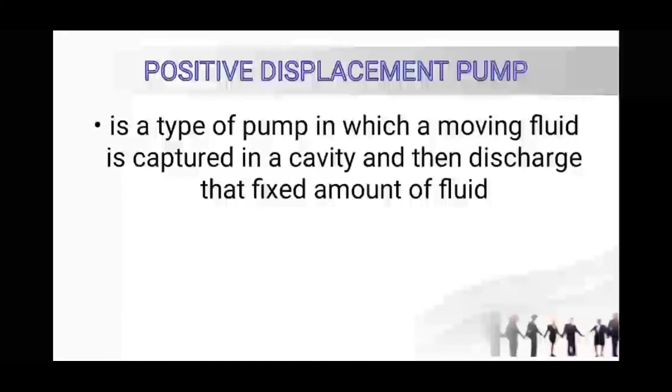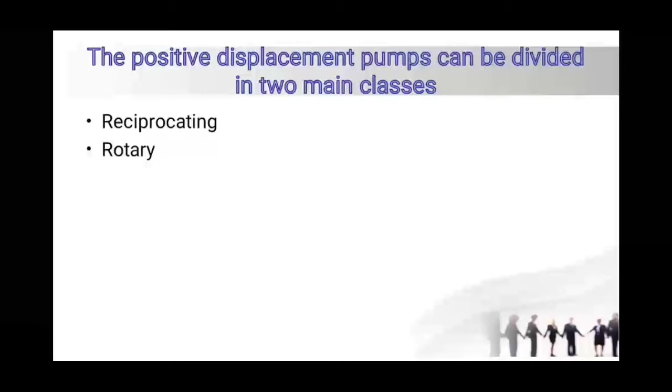Positive displacement pumps can be divided in two main classes: reciprocating and rotary. A reciprocating pump works by the repeated back and forth movement stroke of either a piston, plunger, or diaphragm. So when we say back and forth, it's just like a push and then pull and then push something.

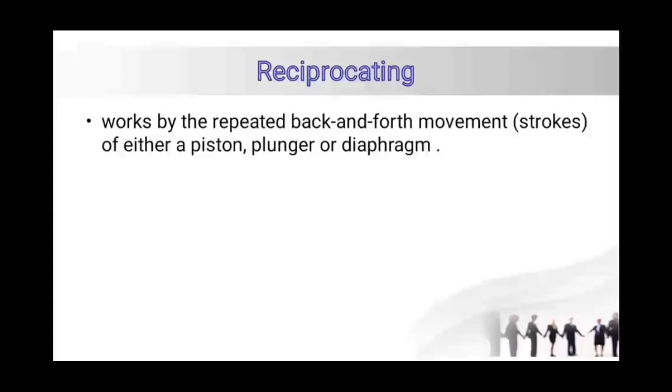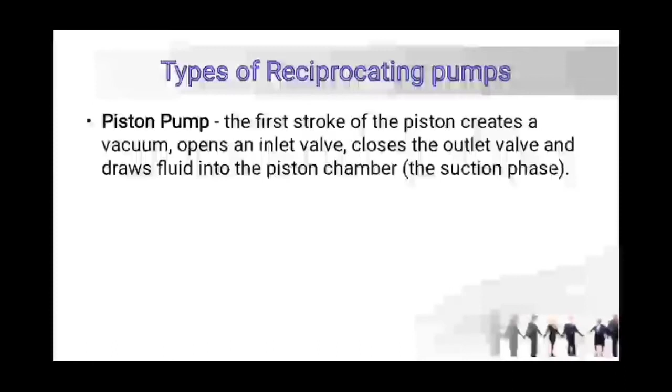Next, types of reciprocating pump. So first, we have piston pump. The first stroke of the piston creates a vacuum, opens an inlet valve, closes the outlet valve, and then draws fluids into the piston chamber. The mechanism consists of a reciprocating piston inside the cylinder with check valves at both inlet and outlet.

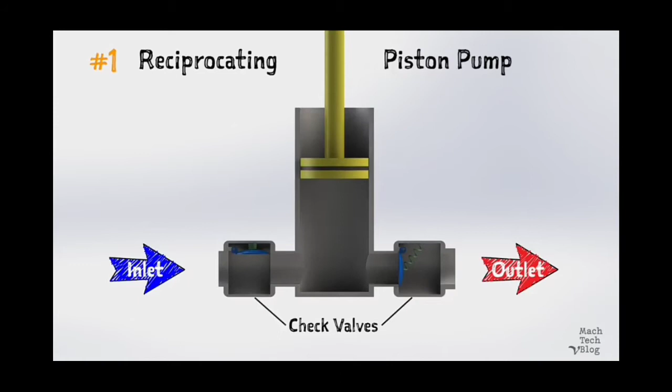When the piston is on its suction stroke, which is the upstroke, the chamber inside of the cylinder expands, the pressure drops, and the check valve on the suction side opens when fluid is admitted to the inlet. The check valve permits flow only in one direction to prevent backflow.

As the valve on the suction side opens, the valve on the discharge side closes. On downstroke, the piston pushes the fluid. The suction valve now closes and the discharge opens to release fluid.

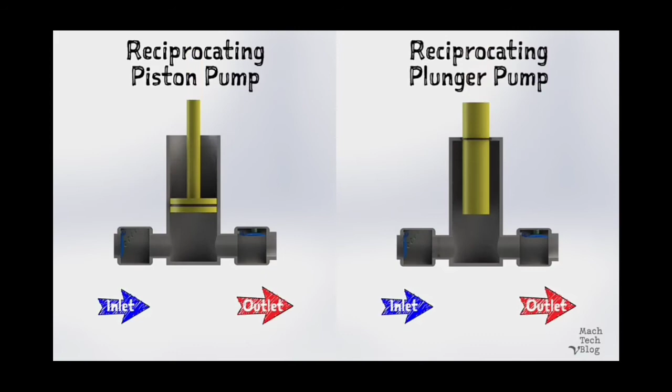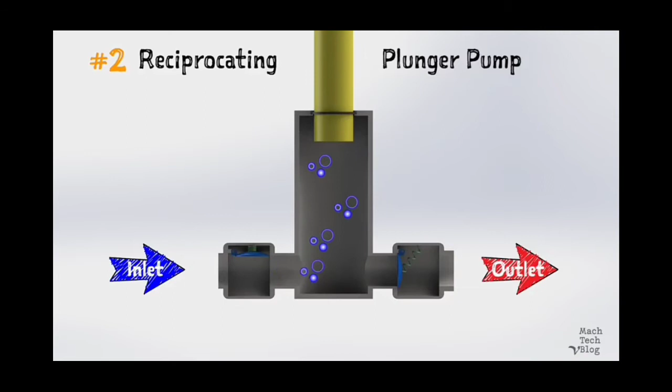Next, we have plunger pump. Plunger pump operates in a similar way. Plunger pumps look very similar to piston pumps, but they work a little differently. Unlike a tight fitting piston, a plunger pump fits loosely to its cylinder. The physical mass of the plunger reduces the size of the chamber and displaces the fluids.

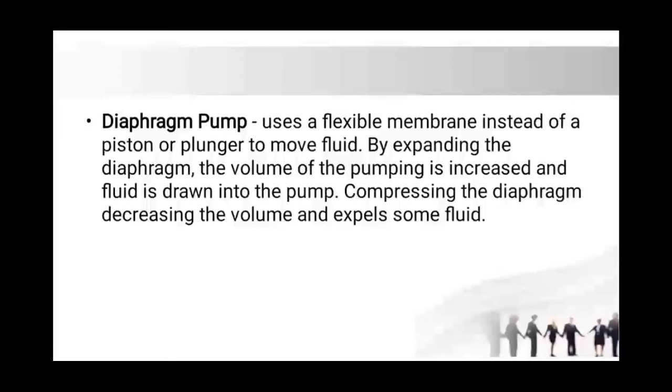Next, we have diaphragm pump. Diaphragm pump uses a flexible membrane instead of a piston or a plunger to move a fluid. By expanding the diaphragm, the volume of the pumping is increased and fluid is drawn into the pump; compressing the diaphragm decreases the volume and expels some fluid.

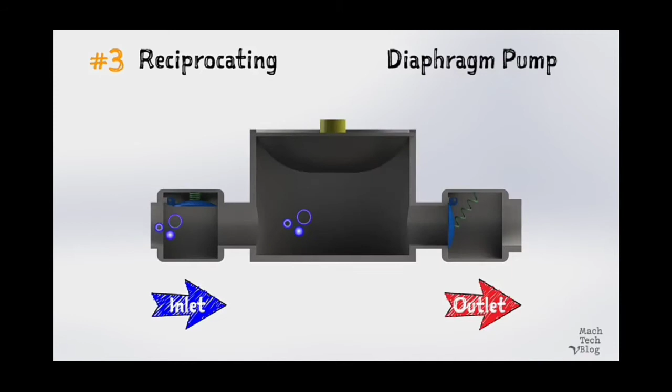Unlike a piston or a plunger, an elastomer diaphragm is flexible. When it flexes, it changes the volume of the chamber, causing the fluid to be drawn into or pushed out of the chamber. Hi, I'm Jan Philip Zambrano and I'm going to present to you the types of rotary pumps.

But first, rotary positive displacement pumps use the action of rotating cogs or gears to transfer fluids, rather than the backward and forward motion of reciprocating pumps. Gear pumps are a kind of rotating positive displacement pump, which means they force a stable amount of liquid for every revolution. A gear pump uses the meshing of gears to pump fluid by displacement. They are one of the most common types of pumps for hydraulic fluid power applications.

The gear pump was invented around 1600 by Johannes Kepler. Gear pumps are also widely used in chemical installations to pump high viscosity fluids. They are also preferred in applications where accurate dosing or high pressure output is required.

Vane pump is a positive displacement pump that consists of vanes mounted to a rotor that rotates inside a cavity. It uses the back and forth motion of the rectangular shaped vanes inside slots to move fluids. The rotor is sealed into the cam by two side plates. Vanes or blades fit within the slots of the impeller.

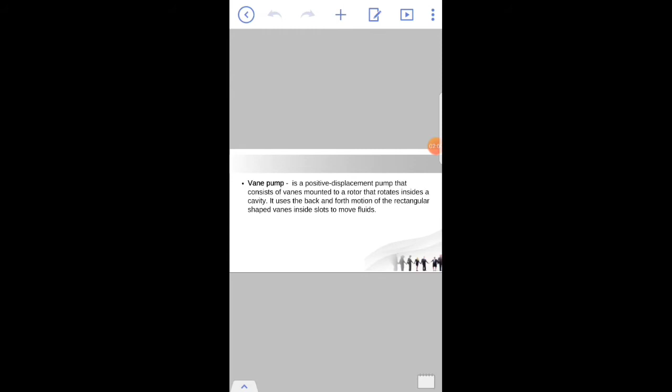Lobe pumps. These pumps are similar to gear pumps, apart from the lobes, which do not come into contact with each other, and offer different characteristics like high efficiency, rust resistance, hygienic qualities, and reliability. As the lobes come out of mesh, they create expanding volume on the inlet side of the pump. Liquid flows into the cavity and is trapped by the lobes as they rotate.

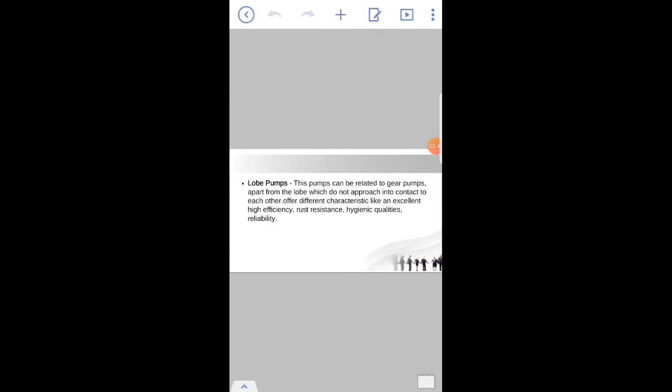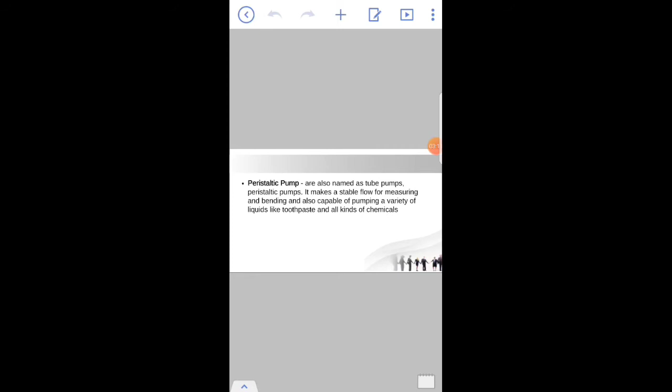Peristaltic pumps, also named tube pumps. Peristaltic pumps make a stable flow for metering and blending and are also capable of pumping a variety of liquids like toothpaste and all kinds of chemicals. A rotating shoe or roller passes along the length of the hose or tube, creating a temporary seal between the suction and discharge sides of the pump.

Screw pump, also known as water screw, is a positive displacement pump that uses one or several screws to move fluids or solids along the axis. The screws take in fluid then push it out from the other end while increasing its pressure. Due to their ability to provide high flow rates even in viscous liquids, screw pumps are ideal for fuel transfer, elevators, and other similar industrial applications.

Single screw pumps or Archimedean screw pumps are used for simple water movement such as for sewage inlet pumps, stormwater pumping, drainage pumping, and to move industrial wastewater.

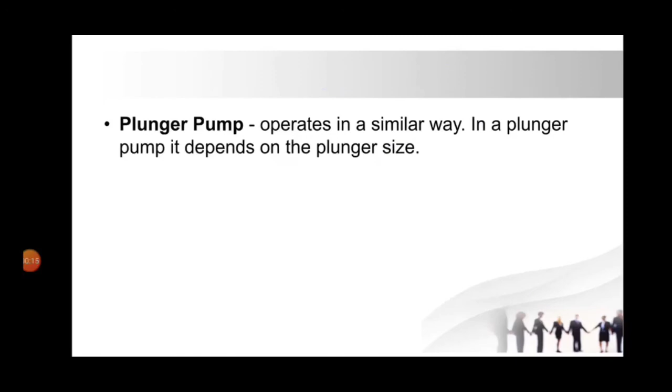John Valdez for the continuation of the report on the performance test of a positive displacement pump, group number 12. My report is the rotary progressive cavity pump. Progressive cavity pump is a type of positive displacement pump and is also known as a cavity pump. It transfers fluid by means of the progress through the pump of a sequence of small, fixed-shape, discrete cavities as its rotor is turned.

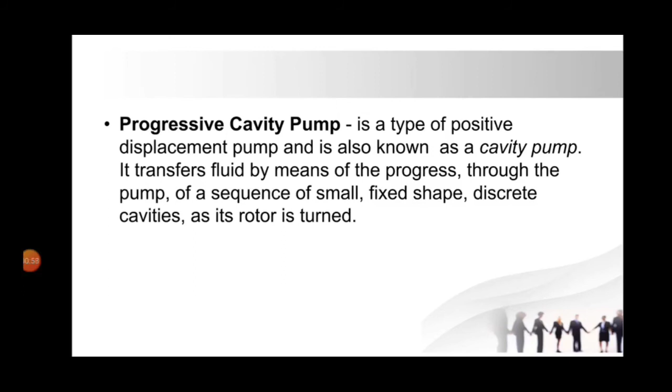So, the rotary progressive cavity pump is similar to the screw pump, but a progressive cavity pump is used when the pumping application is not suited to a centrifugal pump. One of the clearest examples of when to use a progressive cavity pump is when the liquid has higher viscosity or thickness than water.

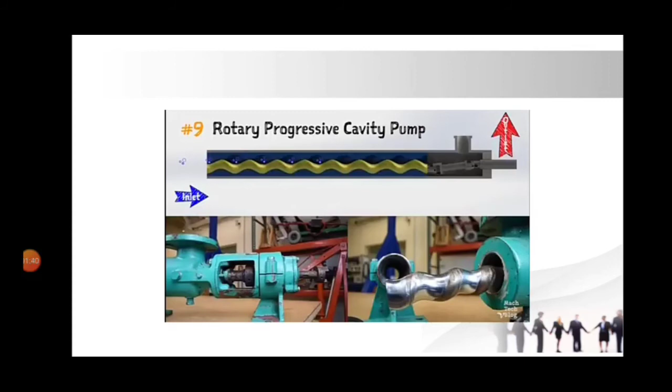Working principle of a positive displacement pump. A positive displacement pump has an expanding cavity on the suction side and a decreasing cavity on the discharge side. Liquid flows into the pump as the cavity on the suction side expands. The liquid flows out of the discharge as the cavity collapses. The volume is constant given each cycle of operation.

A positive displacement pump must never operate against a closed valve on the discharge side of the pump. It has no shut-off head like centrifugal pumps. A positive displacement pump operating against closed discharge valves continues to produce flow until the pressure in the discharge line increases until the line bursts or the pump is severely damaged. It is a constant flow machine.

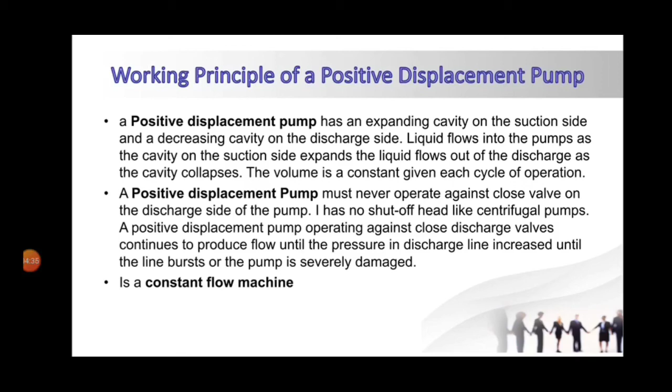Positive displacement testing. Positive displacement pump testing will be done at 25, 50, 75 and 100% of the rated pump speed, and at pressure as near to the rated pressure as possible. The measured quantities will be used to generate a pump performance curve. Where possible, the pump will be tested at the speed at which the end user will operate the pump.

In some cases, they will be tested at a reduced speed, and affinity laws and other statistical methods will be used to generate a curve at the end user speed. If possible, tests shall be run at both the rated discharge pressure with reduced speed and at the rated speed with reduced discharge pressure.